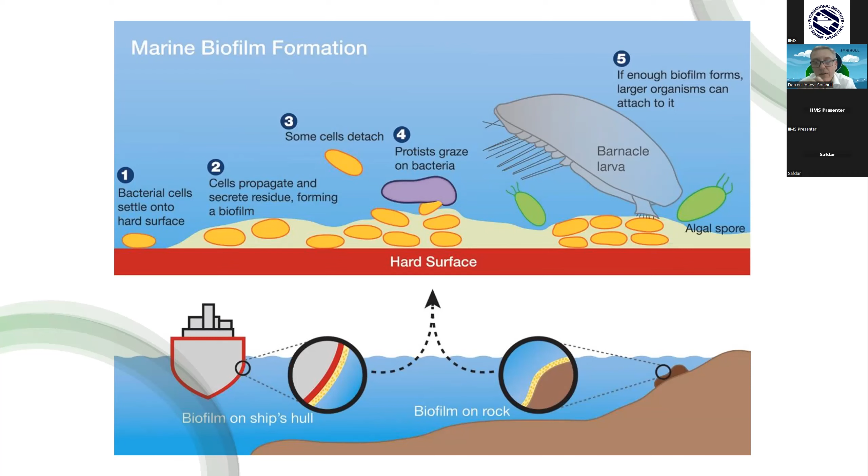So the technological mix that we use, and you'll all be aware of, there are coatings. The coatings world is changing. There are a whole host of different sorts of coatings with different properties and different ingredients. And we're seeing, again, local regulation around that. What biocides can they have in? How much copper can they have in?

In California, I'm not sure if they've passed it yet, but there were certainly moves to prevent recreational boaters painting their own vessel. And that was under effectively their chemical handling regulations, rather than any maritime issue. So the coatings are there. The coatings are changing. There are all sorts of things coming in now, for instance, graphene on some of the harder coatings, some of the ablative coatings. You've then got things like silicone coatings, which are extremely soft.

What we found, and everybody's found, is coatings costs don't tend to go down, and their lifespan doesn't tend to go up very much as the coatings companies battle with the regulators. And in fact, fair play to them, they do a great job of it, and they are trying their damnedest to come up with something that is green, doesn't damage our oceans, and protects our vessels. So they do a great job, but the landscape's changing.

There are new challenger brands coming in with different thinking and new things. The one thing's for sure, every vessel is always going to need coating. Some aluminium don't need it, but pretty much every vessel is going to need some form of coating. So coatings is in the mix, that technological mix, and how we're dealing with it.

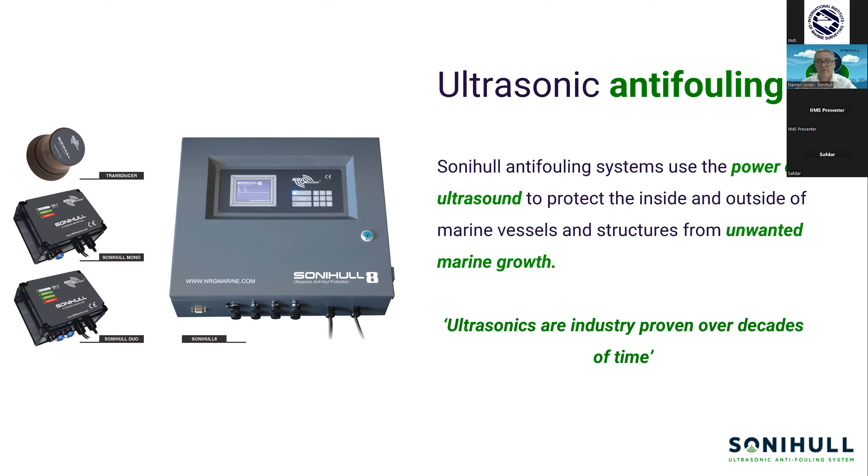Just to explain how the ultrasonics actually works. Now, to a load of surveyors, there's a terrifying word: cavitation. I can always tell when I'm talking to engineers in a big room, because all the engineers sit up the minute they see this slide. But believe me, it is what we call non-inertial cavitation. We've worked with the Centre for Industrial Ultrasonics at Warwick for many, many years to understand the process.

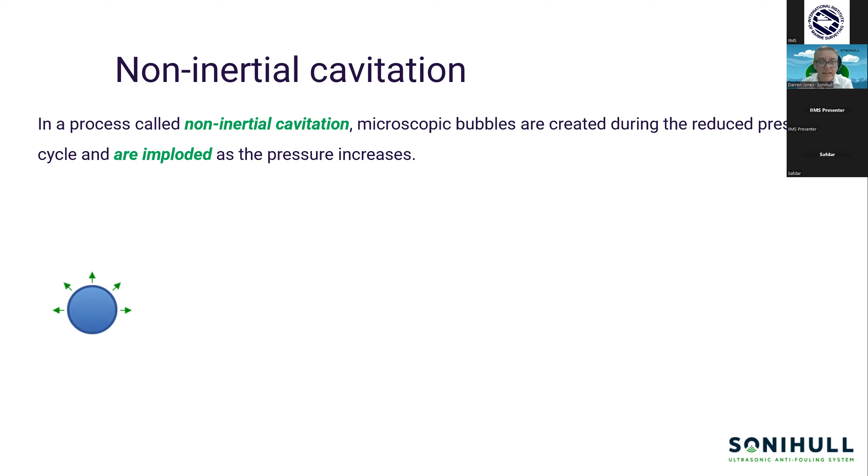And like I say, we here in Abu Dhabi have the world's only full-time anti-fouling ultrasonic laboratory, which is full-time staffed, fully kitted up. Now University of Warwick come and ask us things rather than the other way around. So the cavitation process is non-inertial, i.e. it is not strong enough to damage a surface. That is key. This is Sonihull's kit. I can't speak for everybody else. I'll come to that later. And it literally creates a small bubble.

The small bubble collapses in on itself. And it really is very gentle, but that's gentle enough to prevent single cell organisms. And that's all you're about. And we are turning whatever surface we're on into the medium to have these bubbles go across.

Now, Sonihull, our transducers almost always go on the dry side. So we'll be on the inside of a vessel, on the inside of the hull, making the outside of the hull effectively the speaker of a sound system, an ultrasound system. So those waves will pass through. When we, for instance, go on a propeller, we'll go on a bearing or we'll go on a P bracket, and the sound waves will travel through that, and then they like to escape through the propeller. They like to go to the sharp edges. So that's how we get through a propeller.

And if you think on a bearing, it's got grease. The other time that people tend to really think of ultrasonics is when a pregnant lady has an ultrascan on her belly, and what do they put on there? They put an oil, a grease, a gel. So using things like bearings is actually quite good and really helps with this microscopic cleansing effect. So that's kind of the science.

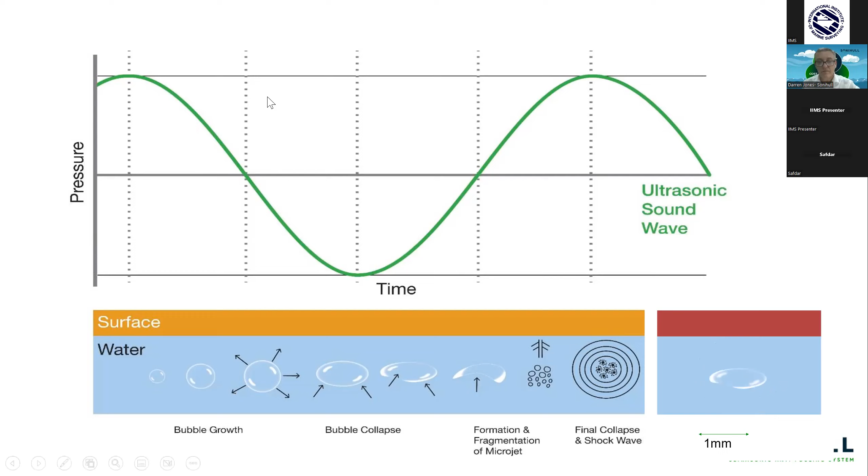What we've tried to do, and we think ultrasonics really does, is meet that crossover where you've got a technology that's actually cost effective and works and is environmentally friendly, because we're seeing so many changes in the regulation, both very locally, sub-locally at marina level, right up to IMO level on a supranational basis. And people really want to future-proof their vessel. They don't want to spend money on something and then be told within 2 years, no, sorry, you can't have that on. And they also don't want to spend money on something that doesn't work. What they do want to do is reduce the cost of their boating.

That's absolutely for sure. Here in the Middle East, slightly different. And to a certain extent in places like Florida, actually what they want to do by preventing biofouling is make their vessel go faster. Which it does. You wouldn't see Max Verstappen driving around with a load of barnacles on his car. He certainly wouldn't be on the front of the grid.

So we're reducing the costs of fuel. We're improving the performance of the vessel. We are also reducing that maintenance cycle, be that on engine maintenance because you're over revving because you've got an inefficient propeller, or you've got cooling system issues if we're on a box cooler, crossover pipe, sea chest, all these kind of things.

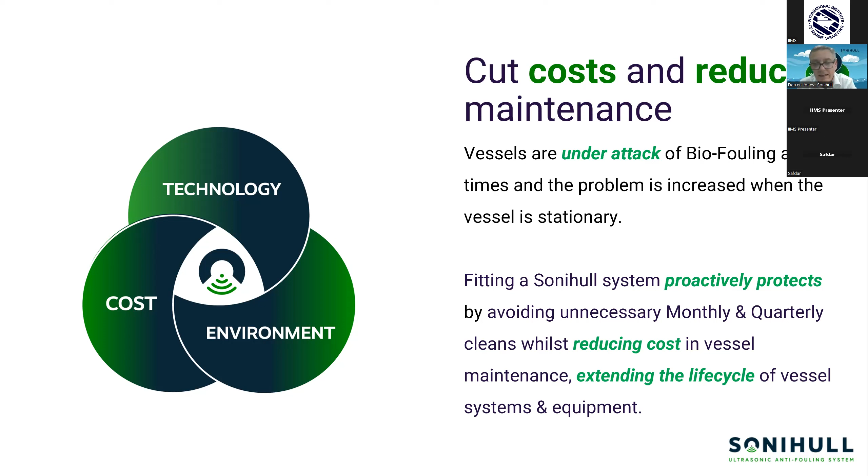I can't leave the greenhouse gas piece. It's absolutely enormous. We are currently working with one of the major yacht companies to see how we can basically become a standard for them. They want it. It's with their legal counsel, because, as I think we heard earlier actually, whenever manufacturers get involved in biofouling, they seem to end up in court. So we're doing this properly, but the yacht manufacturers are now being told by their various governments, similar to a car manufacturer, you've got to reduce your greenhouse gas emissions. And this is a real way of doing it, an absolute real way of doing it.

And you're talking major percentages, particularly for vessels going fast, because the drag coefficient goes up exponentially with speed. We are talking the difference between a clean vessel and a medium fouled vessel is way into 50% of the fuel. That's what the modelling has now shown, and that, working with the British government in particular and the IMO, we're now able to demonstrate.

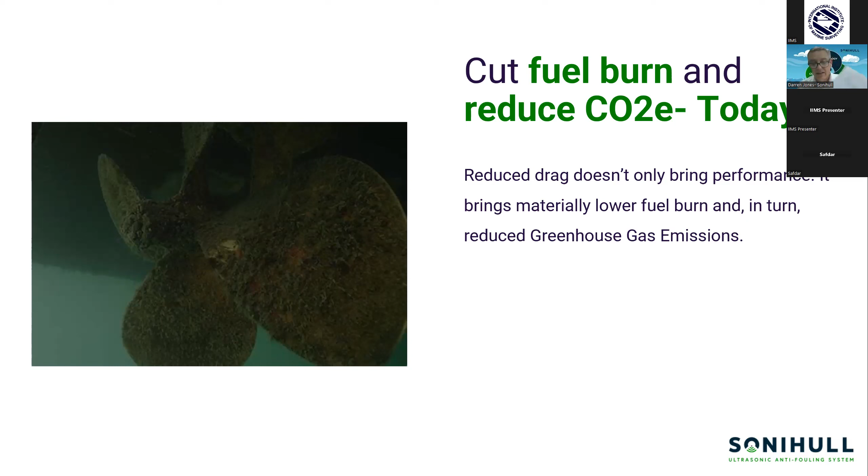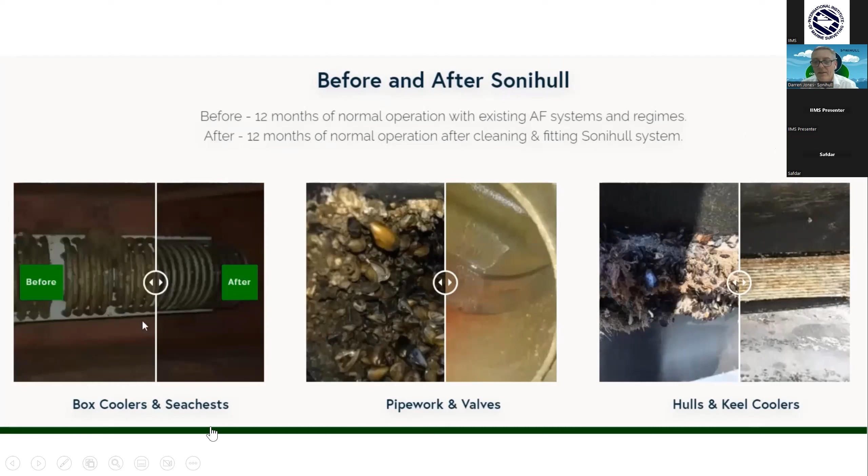Just to show you another example, if I can get this machine to work now. Do I have to do that? Hooray, getting the screen. Come on, screen. Go to the next slide. You can do it. Great, it's my turn to have a tech problem. Hang on, I just need to move that. That's why I can't move that. Next. There we go. Done it. Right, there we go. Technology doesn't beat me.

So here we have just an example. It's really funny talking small craft today, because some of the larger stuff we do really is impressive. So here we've managed to get the signal into a propeller, and we got it into the stern tube in the area around it too. And I think you can sort of see what an area that wasn't protected has growth. That propeller with no coating has remained clean, and that was just with a Sonihull 8 system. So that was just 8 transducers on a vessel of that size.

And what that's meant for that particular vessel is, what they used to have to do is do regular rotations of the propeller while they're at anchorage, which is hugely inefficient. Really does burn a ridiculous amount of fuel for doing very little. And even then, they were still having to have regular polishes. So that's what a Sonihull 8's done there.

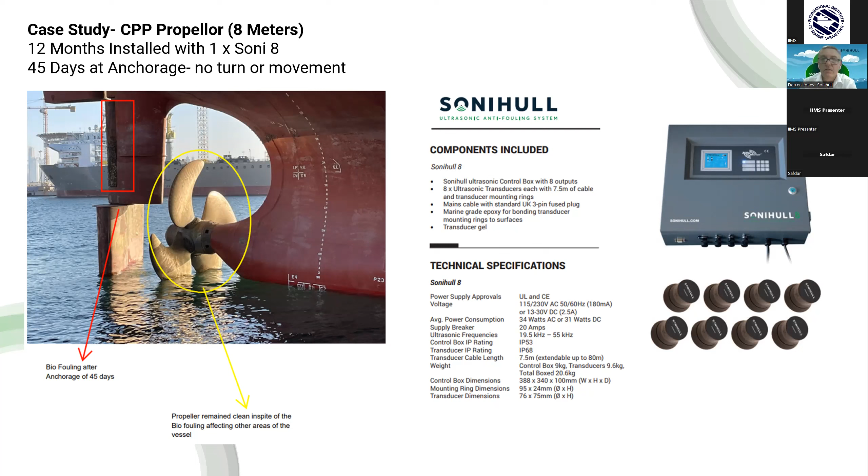But for you as surveyors, what I really want to major on is what to look out for. I want to be absolutely clear, ultrasonics is unregulated. And despite my best efforts at the IMO and then being told that it's going to be 32 years, I desperately want it to be regulated for several reasons. One's a basic commercial reason that half the ship operators in the world don't do anything until they're told to, i.e. it's regulated. But that's obvious. But also there are environmental reasons, and there are reputational reasons for ultrasonics in general.

So the biggest issue we have at Sonihull, despite all our years doing this, despite being on the entire fleet of the Dutch Navy for years, all these kind of things, the number of people that either tell us ultrasonics doesn't work or ultrasonics has caused damage. It is very much buyer beware. Anybody can knock up an ultrasonic device and claim it's an ultrasonic anti-fouling system and sell it. There are no rules, nothing.

And a little bit like, if you think of ultrasonic systems as being a stereo, you think of the transducer as being a speaker, and you think then of the ultrasonic signal being a song. You can go and buy the most expensive Bose system with a great speaker, and you could play some Adele on it, and it would sound wonderful. It would sound like you were in the concert hall with an excellent singer.

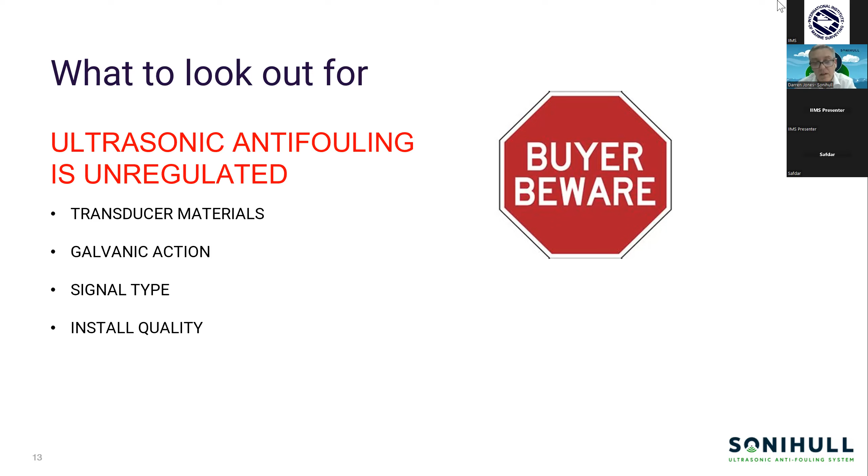A transducer that is fitted poorly is just a waste of time. And actually, it's no different, is it, to coatings? If a coating is applied poorly, you will end up with growth, and your coating also won't last very long. So that installation quality, you need to be checking, has it been signed off by the OEM, or has somebody just bought this stuff off a shelf and stuck it in? Really, really important if you want quality.

And again, this is where support network comes in. If a vessel's going to be doing any international stuff, if it is going to be traveling, you need to know that there's support around the world for it. We recommend on our commercial vessels, they get annual inspections from us, but we do recommend a very, very easy maintenance cycle for vessel operators in recreational, that they just check the transducers once a year and check they're getting crisp signal, which is very easy, but quite often not done.

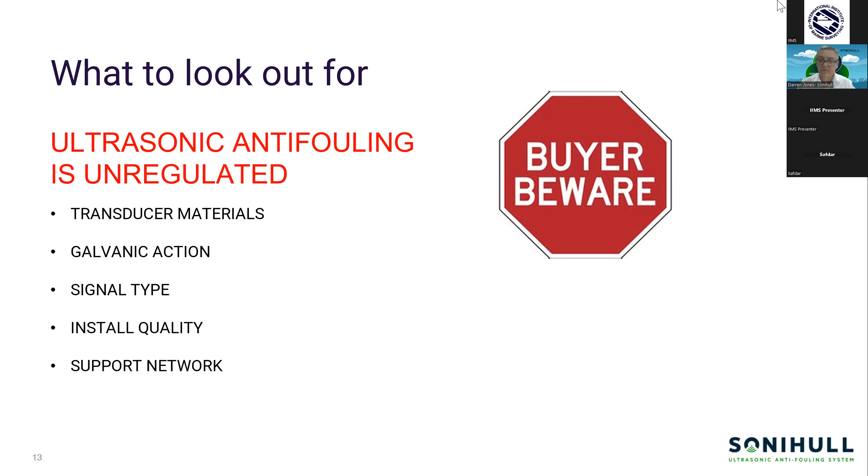And again, if they buy online, fit it themselves, and then find they've got a problem and there's not a local support, they've got a dead duck really, and there's not a lot they can do. So yeah, I cannot reiterate enough, please buyer beware. It is an unregulated Wild West. Ultrasonics works. The biggest competition we have is not our competitors selling great systems. It's people saying ultrasonics doesn't work because they've either bought a poor system or they've installed a system incorrectly or in the wrong places.

So mindful of the clock, just the conclusion. This is an industry proven solution. A lot of people think it's a new technology. It really isn't. It's just one that the industry has been slow to adopt because it's been cheaper to put on biocidal paints, frankly, and to use copper anodes. It will reduce your maintenance cost. We see a lot on recreational vessels. They didn't used to get to 5 years with their coating. You put this on, you're going to get to 5 years because you're not scrubbing it as often, well, hardly at all. And so you really do, over the course of time, reduce your maintenance cost.

You are going to reduce your CO2e, which I know is getting more and more important to people that own a vessel. They really do not want to be damaging the environment. This is not just for hulls. It's for your propulsion, it's for your niche areas, it's for your cooling. So there is no excuse now to have invasive species and nasty things. This is pretty much fit and forget. I know I said once a year go and check. That's a nice to, not a need to do, but we just think it's a good idea if you're serious about keeping your vessel clean.

We can retrofit. Yes, we go on new builds, but the majority of what we do is retrofit. Everything's on the dry side. You don't need to be out of the water to do it. It's really quite simple. We literally just epoxy on our equipment. On some metal pipes, it's a weld, but usually there's no hot works or anything like that. It's very simple, very safe, very quick. It is future-proof. Ultrasonics does not have a negative environmental legacy, so it is not going to be subject to the sort of things we're seeing with coatings and anodes, and some of the issues we have with in-water cleaning at different facilities.

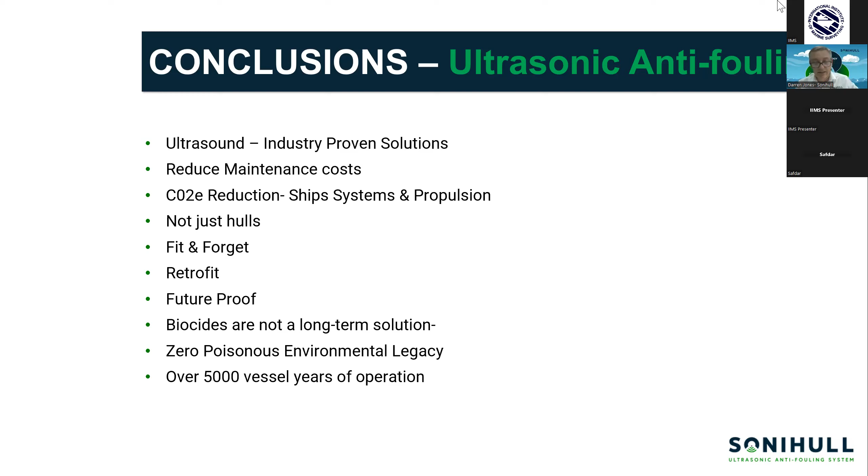I think that just about leaves me with 5 minutes left for questions. I think I've done quite well there. Well, Darren, it's Mike. Fantastic. Yeah, thank you very much. Really interesting topic. I've certainly learned a lot. There are some questions. Let me just come to the ones I've got online here. Query from Alexander. I don't know if you can see these on chat.

Can you go through the assessment process of installing the system on board a GRP yacht in a bit more detail, both in terms of the drawings required and the actual inspection? Yeah, so drawings required for GRP, we don't usually need that many, they're usually available.

Depending on the size of the vessel. A smaller vessel, we actually wouldn't even need a drawing. If we could cover it with a Duo, we just go on either side of the hull. Again, that's if we're talking hull, not propulsion, not other niche areas, cooling, whatever. We wouldn't need. If it's a larger vessel, yeah, we basically just need a schematic of the area we're protecting,

be that a hull, be that a sea chest, be that a box cooler, or if it's a propeller, so we can work out. And we've got a team of naval architects here, and we just knock a drawing up that says, here's where your equipment goes. On a GRP, I don't know if you can see that ring. That ring there would be epoxied onto the dry side on the inside of the hull. A small plate then goes in on it.